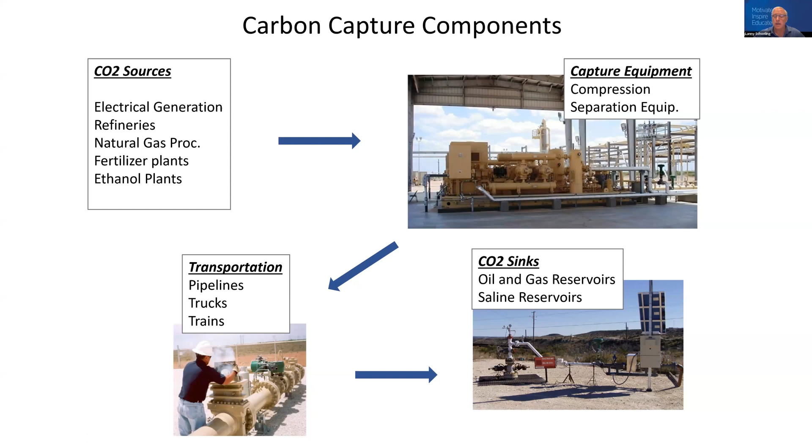And I'll talk a little bit about that. Here's just a little bit more of another diagram, putting that in more detail. We have here again, carbon-based fuel coals right here. They're probably the biggest, but all over, especially here in Texas, I just drove to Florida along the coast, and there's all kinds of facilities that are making products we need to live in the kind of standard of living we're living in.

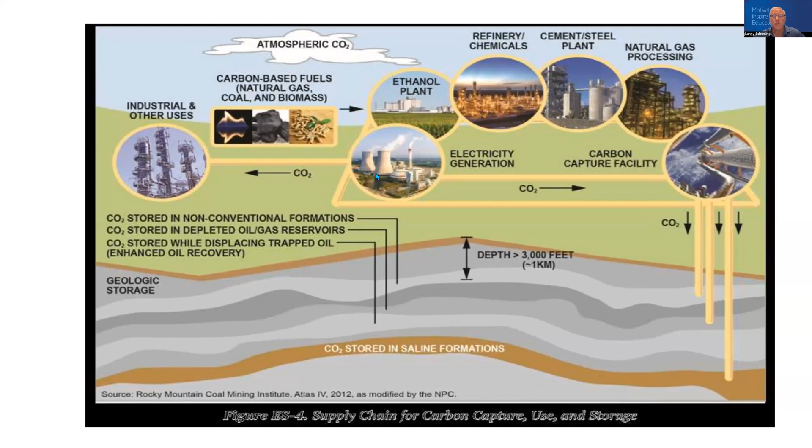But CO2 is being put in the air, and what's great about it, and actually Exxon's been pushing this, which I really enjoy hearing about their project. What they're going to do is put it in the ground way underneath the ocean in the Gulf. And there's some projects that they're looking at there, and that's CCS. And so this is happening, and it's an exciting new field. I mean, it's awesome.

Here are the CO2 sources we have. And here again, a variety of them. Cement plants, believe it or not, produce CO2. And of course, ethanol is one of our biggest, and fertilizer you saw me earlier. But we have CO2 sources all over the U.S. and in the Gulf even.

And so this, I think, will be one of the biggest CCS projects going forward. It'll be right here, and it'll be going in the Gulf here, but underneath. That's what I think will happen. I'm not perfect in my predictions, but I think there's going to be a lot of that going on, and it's going to go on throughout the United States. It already is. There's a number of Class 2 projects that are under the 45Q, and Class 6.

And so in here you got your annual CO2 emissions. You can see just from the size of these bubbles how much is being emitted. And this can be eliminated or minimized by carbon capture. And that's what this talks about.

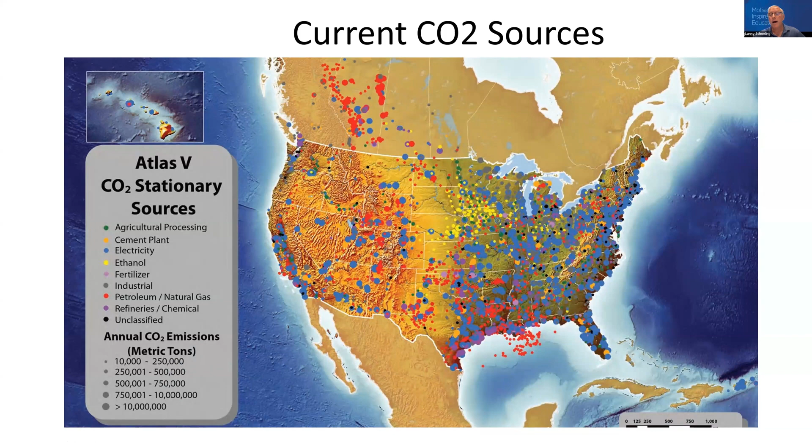This is just one draft national scenario prediction, and it's done by the Regional Carbon Capture Deployment Initiative. I wanted to show it because some of these lines are already in existence. I'll show you that here later. These are all in existence. And there's a few over here that are in existence. Up here in Wyoming, we got some in existence. And up here, going into Canada, we have some stuff going on where they're carbon capturing and putting it in the ground. But they're already currently existing.

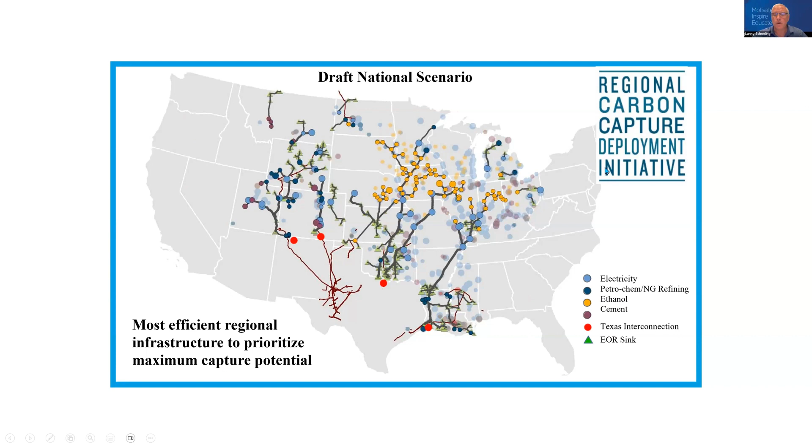But this is kind of like what they see, especially here in the mid section. But I do think they're missing the coastals here, so they need to add those, especially in California. There's a lot of work being done in the California area, and then also the East Coast. So it's just really interesting.

Here is the current pipeline structure, and I talked about it, the Dakota Coal Gasification Plant, and it's producing, and they're putting CO2 in the ground in oil and gas fields up in Canada. And here, this is the LaBarge gas plant I was talking about earlier that Exxon did own. I don't know if they still own it. They probably do. I'm not sure. But then they go into these oil fields up here, and they produce oil from CO2 injection.

And then we have the traditional Sheep Mountain, McElmo Dome, and Bravo Dome here that were natural gas CO2. Now, I think they will be huge in the future. Could be huge, also, as sinks for CO2. But then they went down here, where we have most of our experience in Texas, and it's using it.

And what's great about it, and I'll be describing this, for a CO2 flooder to make money, he has to make sure that CO2 stays in zone where he wants to produce oil, make the oil miscible and produce it. He doesn't want it to go out of zone. He doesn't want any molecules to be emitted in the air. Things happen, but that's his objective. And it's worked for 50 years. So we feel pretty confident we can do this.

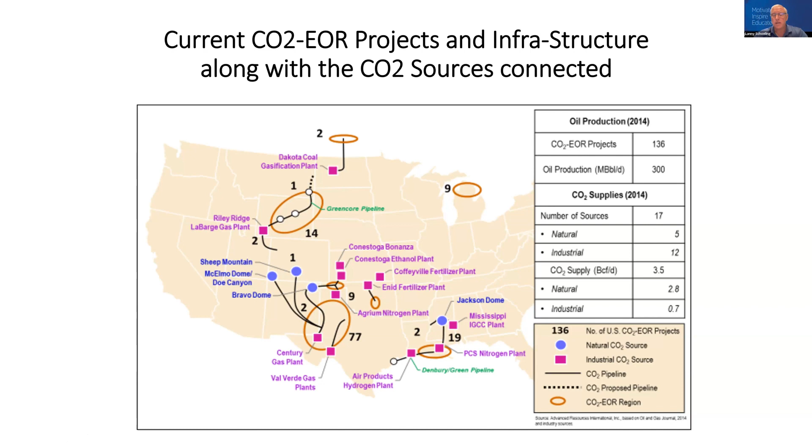And of course, ultimately, the CO2 will crystallize in hundreds of years in the right chemistry. Here is 50 years of experience. I just kind of wanted to go to it here. I don't know if you can see everything there. But what you have here is a CO2 separation plant. You're going in and injecting it.

As it goes through, it doesn't immediately all retain in the reservoir, only probably about 30 to 40%. And then we re-inject it and we continue to redo that. But it's the net utilization that we can actually sequester, and it's usually net 4 to 7 MCF per barrel. And I'll talk about those metrics here later, and also some rules of thumb that you guys can use from now on, so you can show your

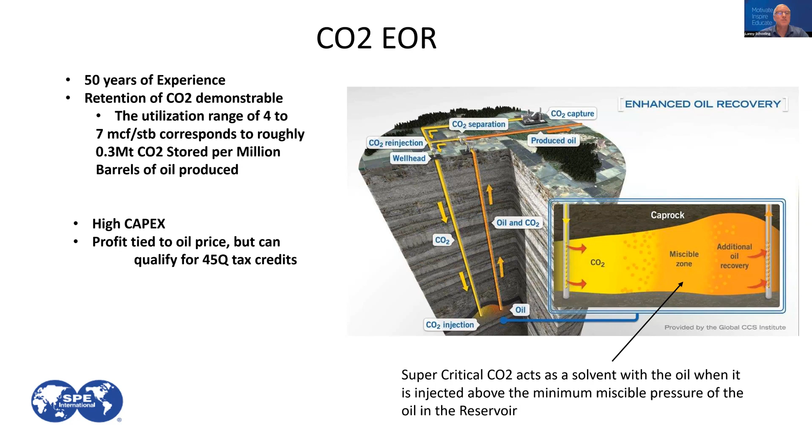abilities with CO2. Okay, right here is the total capture capacity from 1970 to current. Now, I got this from a wonderful instructor at the University of Houston, but I think this was presented maybe a year ago, so it's probably been improved since then, but it gives us a feel. We've got the Century plant here, which is working in Texas, and there's the Shute Creek field, 35 miles northeast of Kemmerer, in Wyoming. And like I said, the Century plant is operated by Oxy and SandRidge, and it's in Pecos County, Texas. And it actually sequesters 8.4 megatons per year, which is great.

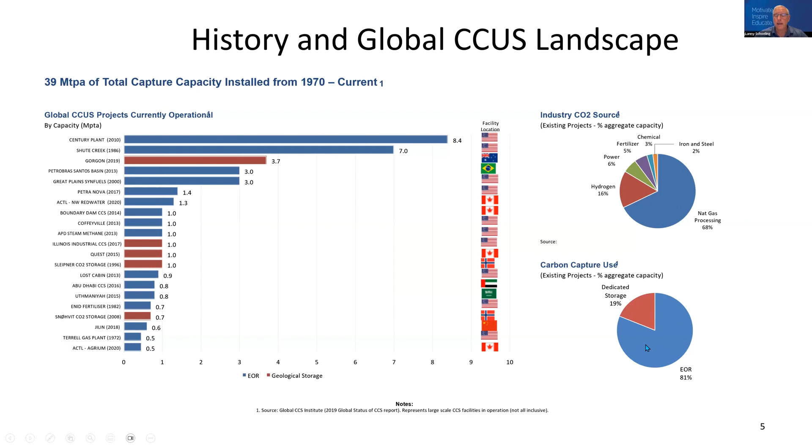And then you can see the blue here tells you where our sources are, and this blue here is mostly gas processing, which is what I described earlier. And then EOR for sinking is mostly what we do for carbon capture at this point. What's great about it is it's low-hanging fruit because we have a revenue source: we can sell the oil by injecting the CO2, and we still sequester the CO2 the same.

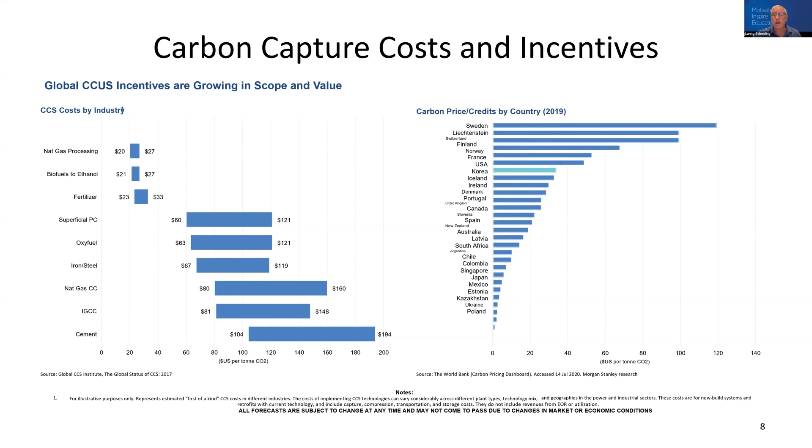And then of course, here on the right side of the slide, you have all of your carbon pricing by nation. And it's really interesting. We're in the middle there. Actually, the right hand is a little bit off on the bars, but this is the U.S. right here. But yeah, these are the carbon prices. Sweden is the highest. And again, this was 2019, so we've got about 3 or 4 years since then. So who knows where these numbers are now? But I'm just showing you internationally, this is a very prominent and worthwhile technology.

And just to give you a feel for the scale of things, you have a small ethanol plant. You can get normally on a regular basis 8.6 MCF per day. Now, if you're going to have a small project like this, you need your source pretty close because you won't be able to afford to put a pipeline and all of that in. But as you get to the larger ethanol plants, like 50 million cubic feet a day, the metrics start going where you can have pipelines a little further, and you can go into bigger oil fields too.

And then this is where I was talking about the net utilization. There's a net utilization and a gross utilization. Gross is when you're recycling; it's how many times you have to recycle. So it could be like 40 MCF per barrel of oil gross because you had to recycle so much. But the net is what stays in the reservoir ultimately, and that's why, if a CO2 flooder were to purchase this from a plant, they look at the net as what they ultimately send to the operator, but then the operator has to recycle, and ultimately what stays in the ground is that net utilization factor.

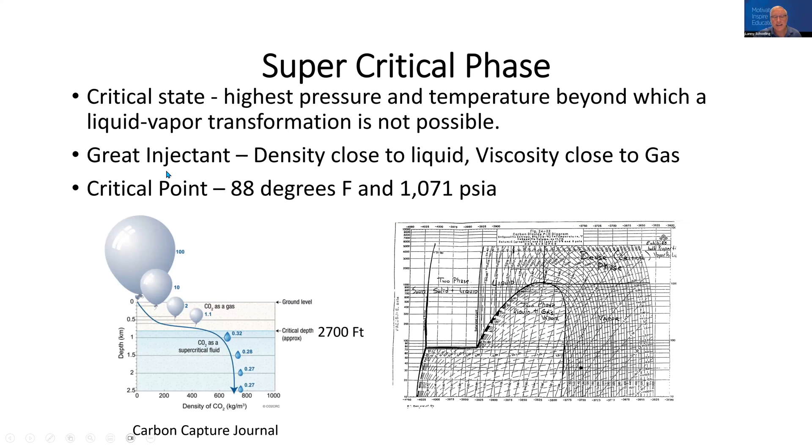What's great about this is it's very easy to inject CO2, because the density is close to liquid and the viscosity is close to gas, which is really low. Now, for CO2 flooders, that can be a harm too, because when they're trying to get miscible and get a mobility ratio going to produce more oil, the viscosity being so low, it'll finger through and won't always capture that much oil, which is why they get only 15 to 20% of the oil in place that they can produce.

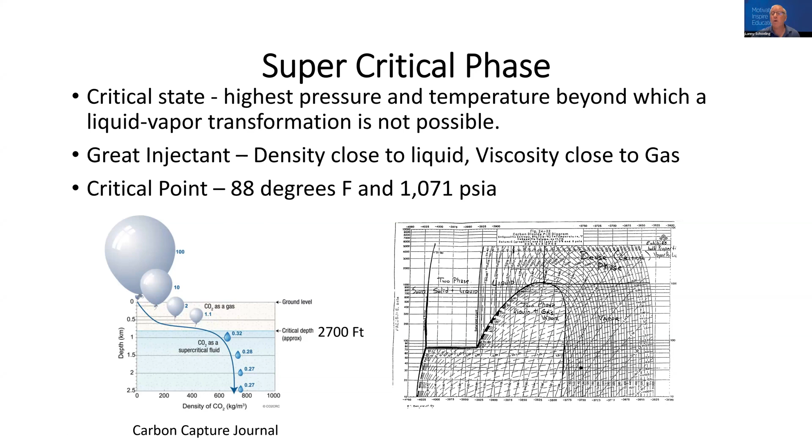But it can create a passivated layer on steel, which is, now this is a good thing. If it goes in, it can create a product that actually keeps it from continuing to corrode. So it will reduce corrosion from carbonic acid, which kind of helps you a little bit.

But overall, your carbon steel specifications, you want higher carbon content, and carbon steel favors adherence of protective corrosion products and corrosion inhibitors. Now, you can put those in, and a lot of them, that's what they use. They use the corrosion inhibitors instead of having to create these alloys, which is the next thing, where they have to put 316 stainless steel, although they do still do that where they can't put the corrosion inhibitors, that sort of thing.

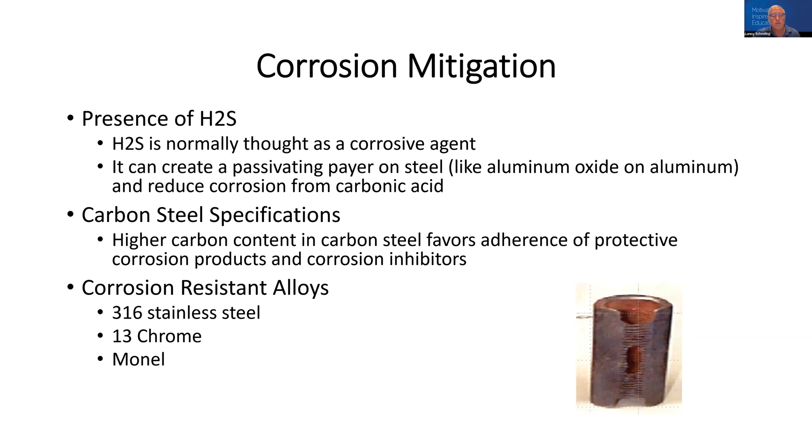But 13 chrome and Monel, those are other alloys. And I got another slide on this because it's so important. Plating and coating. You can also put nickel. You can also coat them with polyethylene. There's a lot of vendors out there now that have coated pipe. That's what Kinder Morgan, when I was with them, and Shell, they did that all the time.

And then the last was, you want to make sure that it's nitrile and Viton, because sometimes the CO2 will go into these elastomers that are not made for CO2, and they will cause them to harden, and then they'll no longer be good seals. Injection of corrosion inhibitors, I've talked about that. And then of course cement, you want your cement to be a cement that will not degrade with time with the CO2.

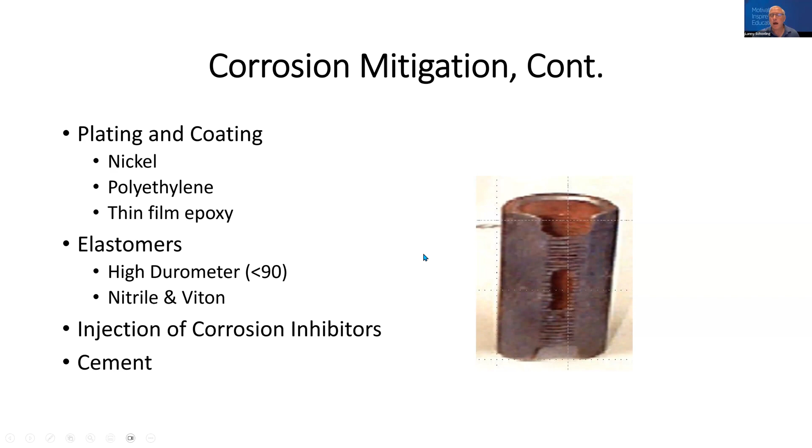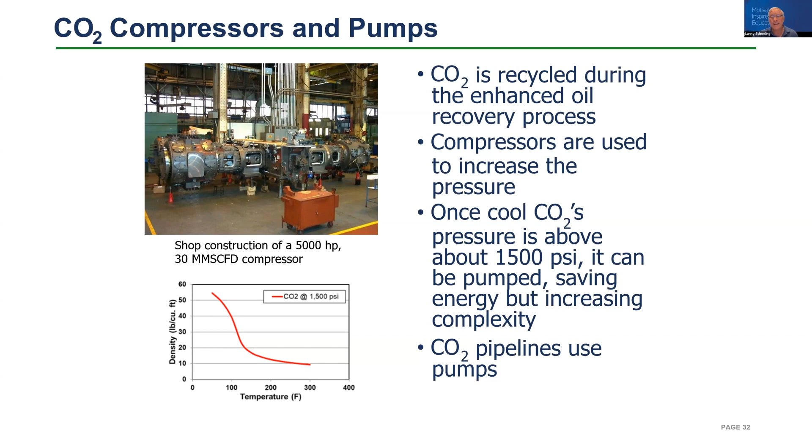And usually by the time you get with the compressors, you get the water out. You don't want any water in there. You want to dehy it. And then you want to dehy it after too, I think, at the same time. Okay, I want to talk a little bit about operations, and then we're gonna move on to one other thing.

And you inject it, and what it does is it keeps the CO2 from wanting to finger, and it forces the CO2 to have to go back and get the oil in the ground. And it's been great. Some of these operators have put as much as 2 pore volumes of CO2, and they can produce much more oil. When we first started doing this way back 30 years ago, we thought, oh, all you need is a 10% slug. No, actually, you can inject as long as you have the right economics on the producing well. You can get a lot more oil out of the ground with CO2.

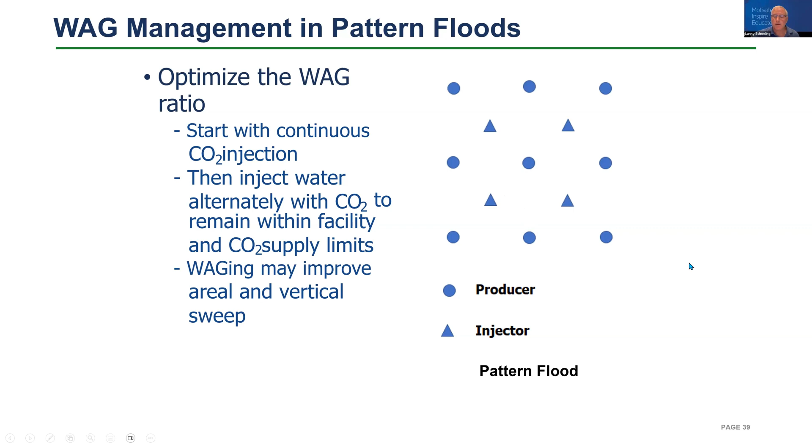It both improves your vertical and areal sweep. Artificial lift, very important for CO2. Most of the time we like to use gas lift, but we do also use beam pumps. It depends on the location, probably the size of your field and how fast your rates are. There's a lot of things going on.

But then the remedial work: you've got to lower your pH, you've got to put in phosphonate inhibitors, and you've got to be concerned about paraffin and asphaltene deposition. Because when you're CO2 flooding, right near the wellbore you'll see a pressure drop, and whenever that pressure drop occurs, you're going to see precipitation of asphaltenes. But what we don't want is CO2 breakthrough, and that's why we do WAGs.

But we have also used cement squeezes if we don't want it to go in this part of the zone; we want it to go in the oil-bearing zone more. We don't want any of that CO2 going anywhere else. Polymer gel squeezes were wonderful for us in the SACROC field. We put thousands of barrels of the polymer gels in there, and there's an SPE paper on that if you want to look it up.

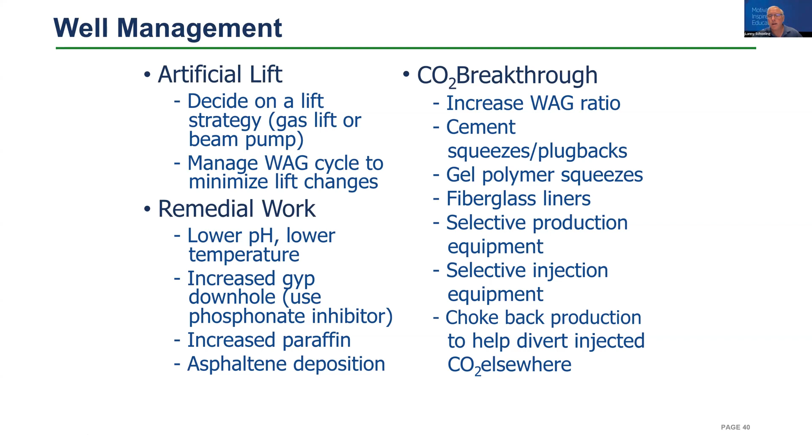Fiberglass liners. But the gel polymers, we're talking a cost of only about 3 cents per incremental barrel, so it was very good on the cost factor overall. Production equipment is very important. And I'll talk about monitoring; we've got to do step rate tests, and we'll talk about this as we go forward.

This is another system that I wanted to discuss, and all of us engineers, and now regulators, will want to be involved in this too. The SPE has put together a system called the storage resource management system. There are documents that lay out the Bible on this, on what terms to use and what this means and what it doesn't mean. What's great about it is it's very similar to the PRMS.

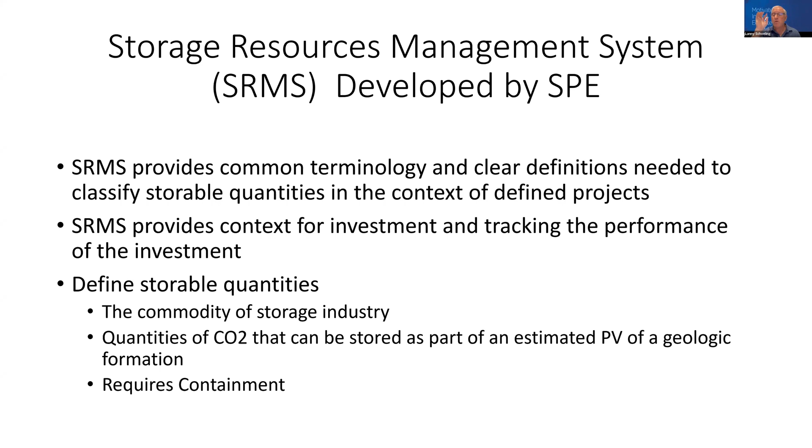That does all the reserves for the world, and this works on the same basis. What's proven reserves? What's probable reserves? What's possible reserves? Now we know what's for sure a good place we can put this storage, and that would be capacity. The capacity is really where we want to go. And now these storage fields are worth money, because they're a good place to get rid of this CO2 and keep it there.

So now we have commercial: if it's proven, probable, and possible, it falls in this category. Then we can start categorizing other fields, and they could be contingent storage, where you need a source close and all that. Capacity is where we ultimately want to go. But with contingent storage, we just don't have all the hurdles cleared for this project to work, so it'll be under contingent storage resources.

Then you've got plays, leads and prospects, which is prospective storage resources. And then you've got range uncertainty: possible, proven and probable capacity. It's a way we can categorize this, put a little bit of value in, and lay out what's really working and what's not, very similar to what you would do with reserves in oil fields.

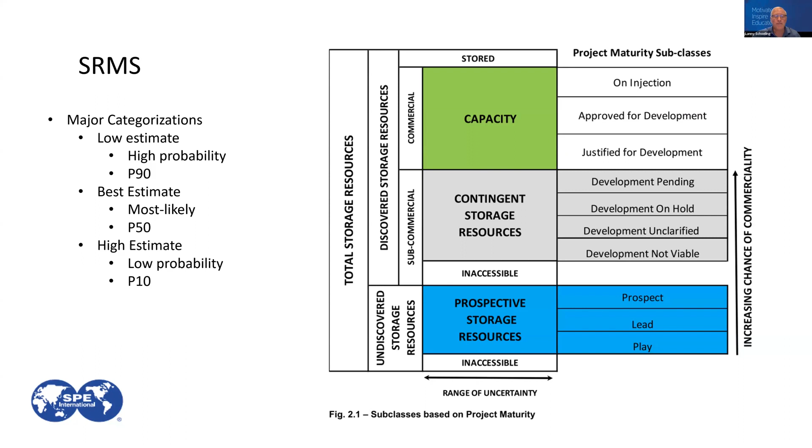Over here you can see we have a low estimate, which would be proven, a 90% chance that this is going to work, and usually it does; it's probably higher than that. A 50% chance is typically your best estimate, and that's probable. And possible is that we could get there, but we only think there's a 10% chance. That's all we know at this time.

45Q tax credit. This is as of January 2021. It could change, and it's already changed several times. Sequestration credits increased. Now this is for saline. Sequestration credits for CCS increased from $35 to $50 per ton at that time, and I think it's $80 now. EOR credits increased from $23 to $35, and I think that could be the figure now.

But I just wanted to give you one that I knew of that was given to me at one time, and I felt good about it. And after your facility is placed in service, you have 12 years to use it under this 45Q.

Class 2 is your oil and gas fields that are being produced, and you're wanting to go in and use EOR, CO2 flooding. You have to qualify under a Class 2 permit, and you are primarily focused on protecting drinking water. Now, I've already told you, a good CO2 flooder doesn't want it to go out of zone. They don't want it to go in other zones. They want it to go in the zone that they produce oil in. And so they put cement plugs everywhere along there, even in Class 2 projects.

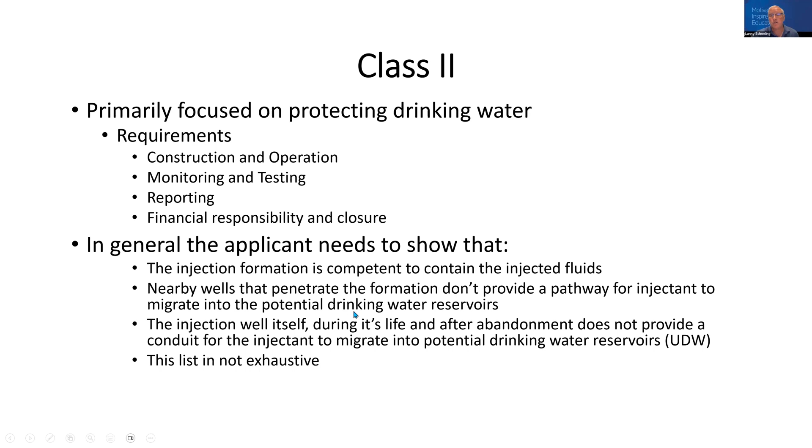The injection well itself, during its life and after abandonment, must not provide a conduit for the injectant to migrate, and again, it's just protecting the drinking water reservoirs. But the people that I work with go to all intensity to make sure this just stays in the oil and gas formation that they originally put it in. And there's a number of reasons why you have to do that anyway. This list is not exhaustive, so there's more things. I just wanted to throw out a few of the things that were important.

Class 6. What they're focusing on here is protecting drinking water and ensuring long-term storage of CO2. What they're addressing is they model it, and we have to make sure that plume does not go anywhere but where we want it to go and stays in that formation. This would be for Class 6 wells going into saline reservoirs or other reservoirs where you can place this CO2. And you have to make sure corrosion with water is not a problem, and you have to show that with either inhibitors or the right pipe. And large anticipated injection volumes.

I'm sorry, I thought I did a spell checker on this, but anyway.

Requirements are very important. You have to have extensive site characterization requirements. Construction materials must withstand contact with CO2 over the life of the project. Monitoring and testing, and that's going to be the next slide. I'll show you what we do in monitoring and testing.

And you got to report. Some entities require reporting at least every quarter, and it can go up from there. And there is another one I'm not going to talk about. It's a California system that is also market driven, and it is Class 6 intensive even for oil and gas fields. I mean, it's intense, and it should be. It's good. Financial responsibility here.

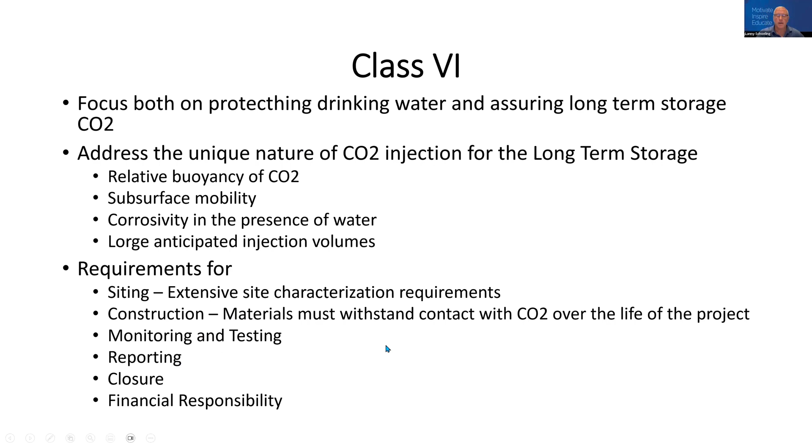You can see closure. Monitoring and testing, MIT is very important. What we're doing there is we're pressure testing the casing, tubing, and packers. That means if you have intermediate string and all that, you want to make sure that all of those are secure and you put pressure on them. And if they don't hold pressure, you got a problem and you fix it. And I think we also run temperature logs and noise logs. That's similar to an echometer for the oil and gas guys out there. And with temperature logs, you can find out where your fluid's going and where it's not.

Operational testing, you want to always be doing material balances where you're injecting. If you have a closed system there in the formation, you make sure you can do a material balance and know that, hey, my fluid's staying in zone, and you can do the production and the injection and keep those material balances on target, so you know that you're not losing CO2 anywhere.

Injection step-rate testing, that's so you don't frack the well. So what they do is they go in, and all these are just good prudent practice. Before we were getting any credits, CO2 flooders did this every 6 months because your frac rate changes with the pressure in the reservoir. And so you got corrosion monitoring, which is coupons and casing inspection logs. And then you do pressure fall off, at least every 5 years here.

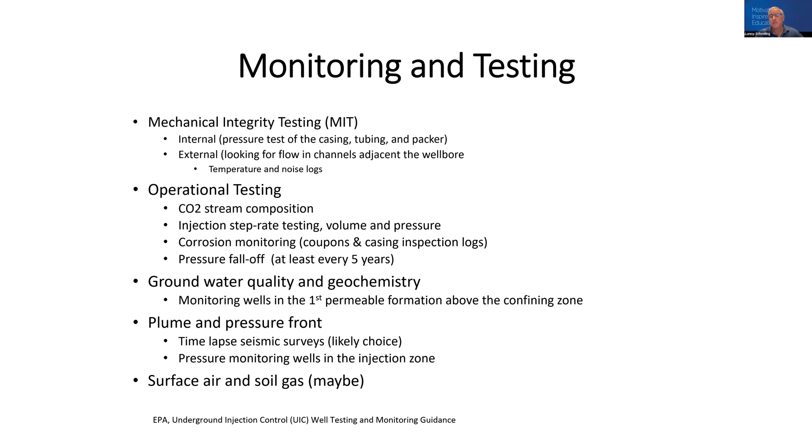Plume and pressure front. This is from modeling a lot, and you use all the pressure monitoring wells in the injection zone and outside the injection well to do it. And then also we have surface air and soil gas. What's great about it is you can measure the surface and see if there's any hydrocarbons in the surface, or you can measure gases and see if it's increased in some places more than others. You can do a lot of things.

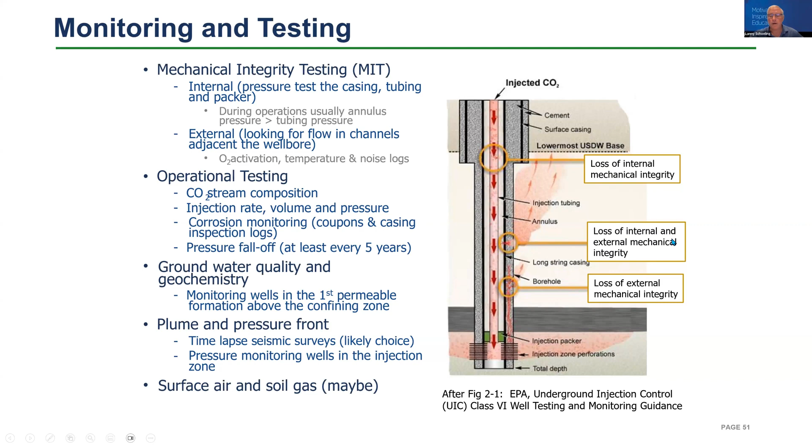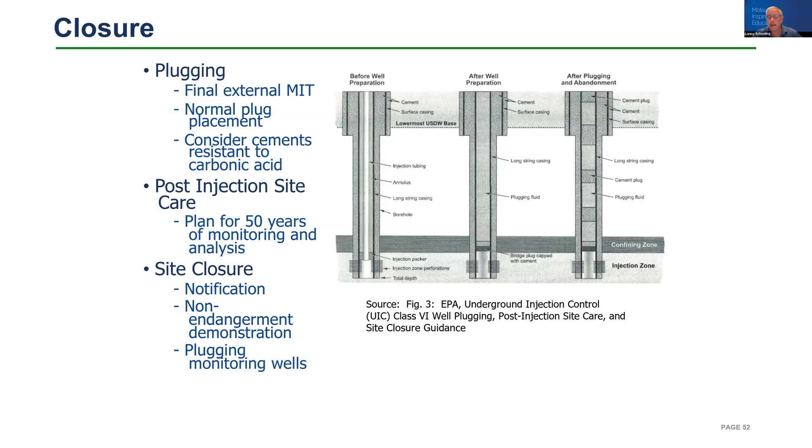Okay, I'm going to go really quick now, because I don't know how much time John's going to let me have here, but I got at least another 10 minutes, I think.

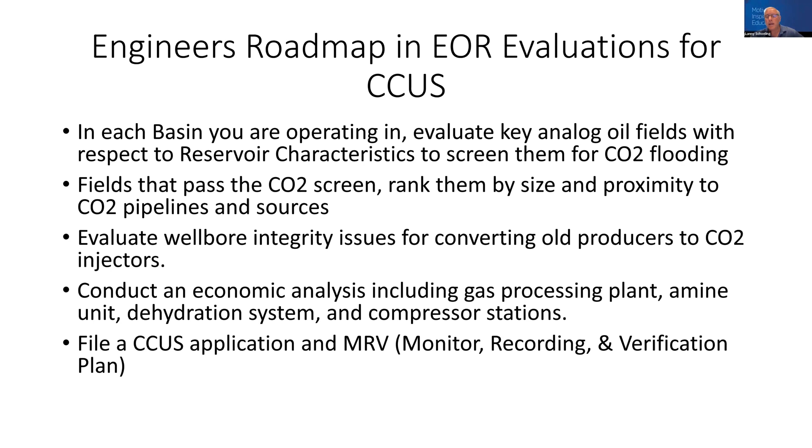And then you want to have a good CCUS application, and you've got to lay out a monitoring, reporting, and verification plan, which we talked about. Operators have been doing this anyway, but they're going to be sending those reports to other people, where they did it just by themselves in the past.

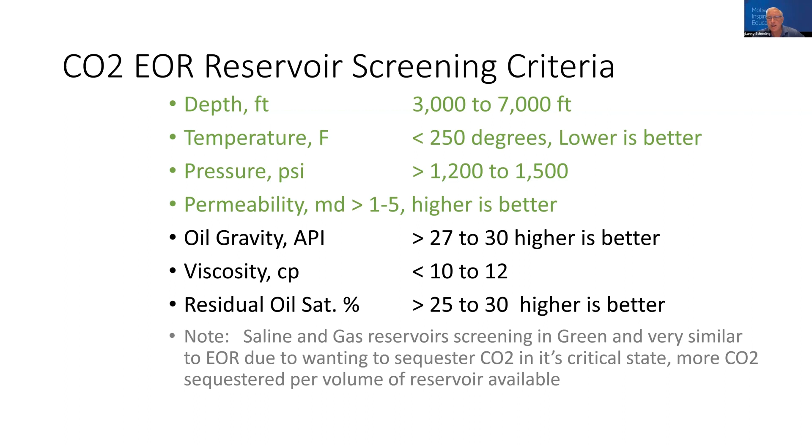What are the first considerations in screening? Distance from source to pipeline, and where are you going to go to sink it? Miscibility. If you want to do a CO2 flood, you've got to have miscibility in most cases. Now there are immiscible cases, and one we did at Kinder Morgan at the Yates field, but it was a top-down flood, and it worked very well, very efficiently. Heterogeneity is important, and then lease considerations. You've got to own the field, make sure of the land rights so you can sequester this and you aren't going to have any people going after you.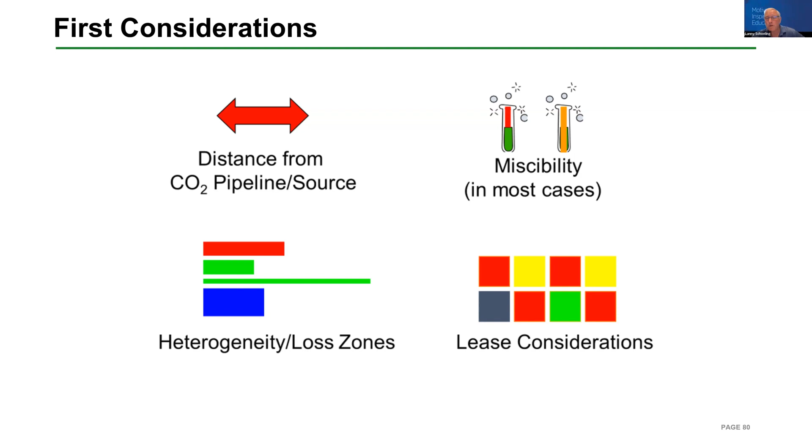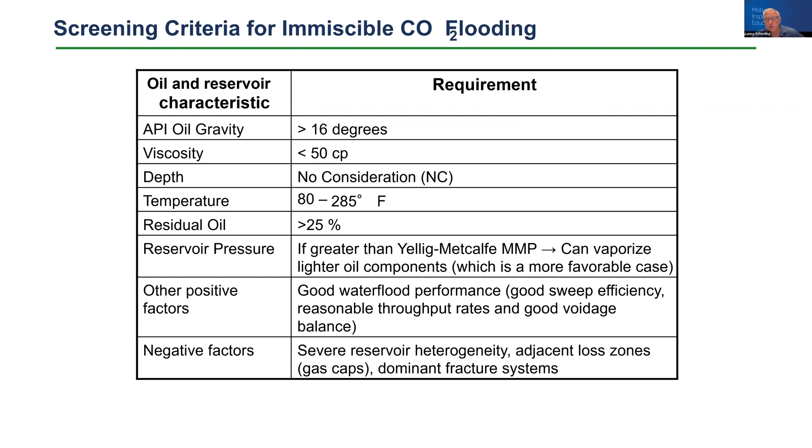This is for immiscible flooding, and here's where I was saying you can do this, but if you can't do a miscible flood, you can still produce oil. That's kind of what this slide's all about. I'm running a little late, so I'm going to keep moving here.

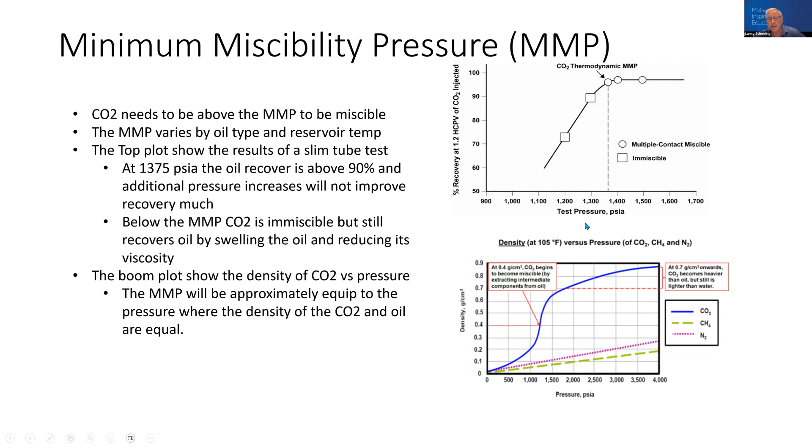Actually, methane mixed with your CO2 causes the MMP to go up. So it's important that you understand that. These are some of the factors in IRR. The biggest is oil price, and right now we're kind of on the borderline, well, depends on how close again the pipeline is and all that, but we're on the borderline right now, even at $70, and I got a slide on that.

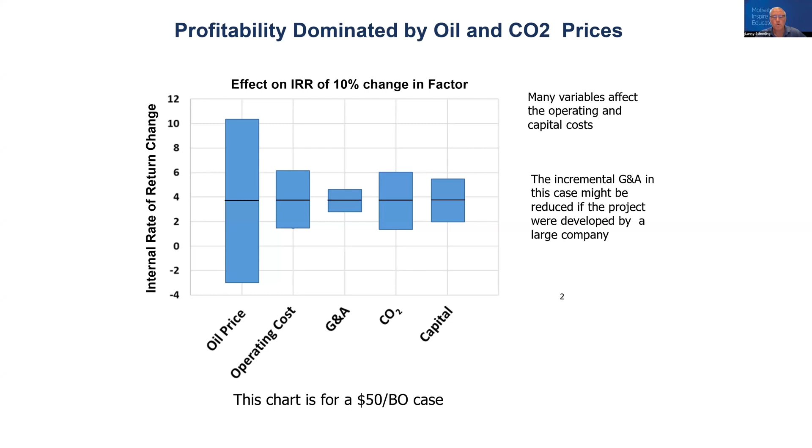Anyway, this chart is for a $50 per barrel oil case, and you can see the difference in internal rate of return you'll get depending on the oil price, the operating cost, G&A, CO2 and capital. So you can see that the most important for a CO2 flooder is oil price.

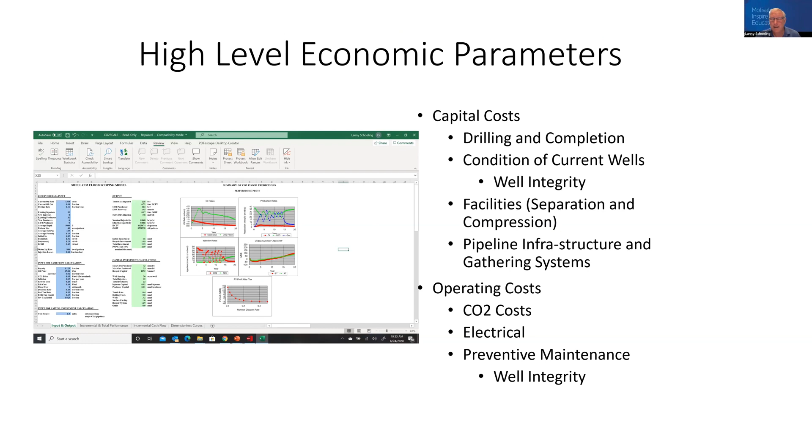And then there is a slide, and if you get a hold of me, I can send you this. It's a spreadsheet, and it works very well. It's based on dimensionless curves, and you can put in your drilling cost, facilities, pipeline, your operating costs, CO2 costs, electrical, preventive maintenance, and then your pipeline costs. It's over $100,000 per inch mile to put a CO2 pipeline, but that's kind of where we are here.

Thoughts I want to leave you with. Good, I still have 10 minutes for questions.

CO2 floods have long payouts. They do, so don't be surprised, even when you are sequestering CO2 and maybe getting these credits, it's still going to be a long payout. And I've said $65 per barrel. This is probably a year or two old. So I think we're right on the cusp right now on a typical field and an average distance of pipeline from your source, and how much of that carbon credit they're going to let you have. CO2 floods require large capital commitments, huge.

Incentives like 45Q could push projects over the goal line if capture and transportation costs are low enough. That's because the person sequestering at the plant has to build separation equipment, and he has to build compressors to get it to a supercritical fluid. He has to put dehy plants in to get rid of the water, and so it's costly.

There is science behind this. There's 50 years of science, probably longer. In 1952, a patent was issued, and there's this book, Practical Aspects of CO2 Flooding. You can get this from SPE, and it really is the Bible for practical CO2 flooding. When SPE sends that to you, they send you that program that I'll send to you too if you email me.